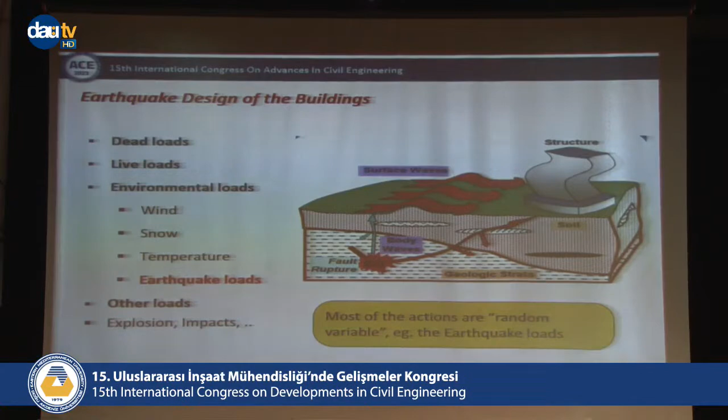But the earthquake itself, the rupture, changes randomly, so that each earthquake teaches us a lot of things. Therefore, the earthquake action is different - it is random and rare. Therefore, we should include in the design something that we don't really know very well.

In other cases, we have very big site effects because of the soil and valley effects. The soil changes the characteristic of the earthquake, the characteristic of the ground motion. Even with the same earthquake, the same motion, we get different ground shaking according to different soils and different sites.

But after the Maraş earthquake, there is a lot we should learn, that it is not only this. In general, we were thinking that only the rupture and the site have the most effect, but after that we learned that there are still other factors to take into account.

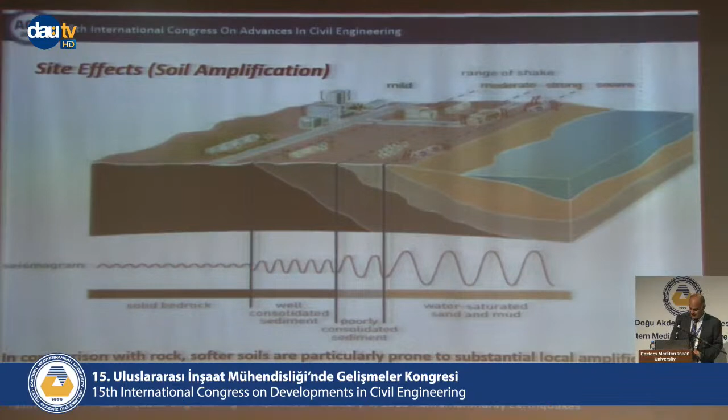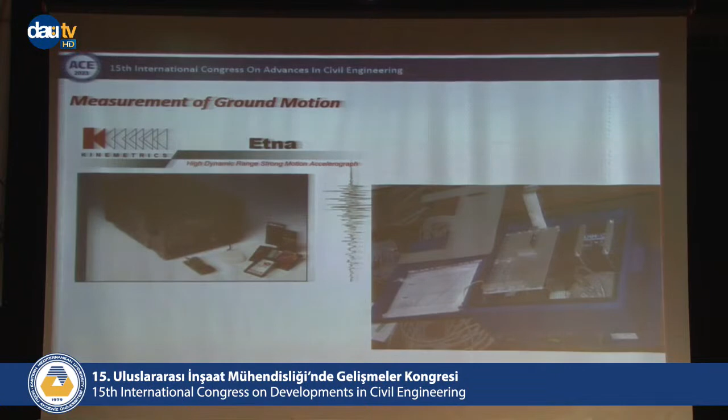Here's how we learn from the earthquake: we measure the acceleration. Especially when teaching my students, I say, why acceleration? It is very simple, because it is a force. Force is Newton's second law: force equals mass multiplied by acceleration. Therefore it's a very simple rule. We need the acceleration. We don't care much about velocity or displacement, because as Newton's second law says, very simply, F equals ma.

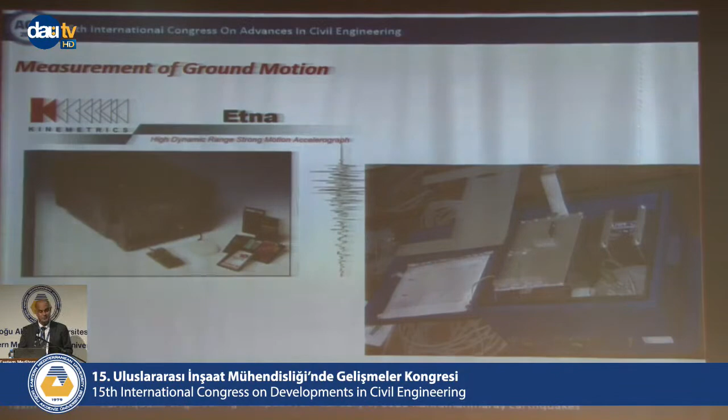Therefore, but which acceleration? As you see, we have different records, and each record has special characteristics. They are not the same. Even if we have the earthquake at the same location, the same fault, the ground motion and acceleration will differ because of the rupture process during the earthquake. We cannot expect the same. We have different results.

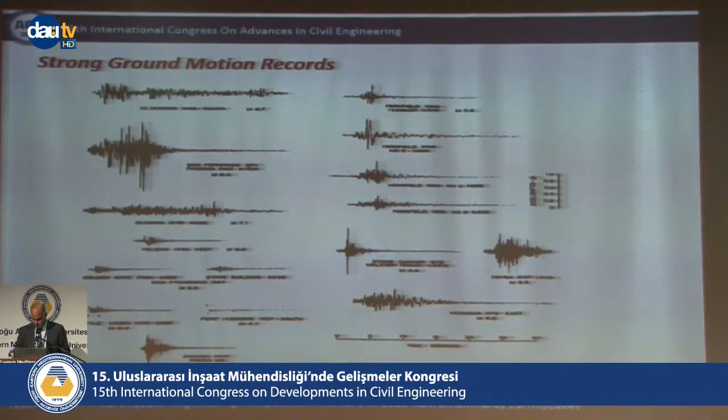Therefore, it's the simple rule that we have mass and acceleration. But which mass? The structural mass. If you have a very light structure, the earthquake force will be less. But which acceleration? Is it the ground acceleration? This is the basic question of earthquake engineers. Is it the ground acceleration? No, it is the acceleration of the mass itself, the acceleration of the structure.

Here, it is not only the ground shaking, it is the building shaking itself. The building has its own characteristic that we are designing. Therefore, we are the ones who decide the acceleration of our building. We call it spectral acceleration. Maybe you've heard this a lot, spectral acceleration. It is the acceleration of the mass of the building, not the ground acceleration.

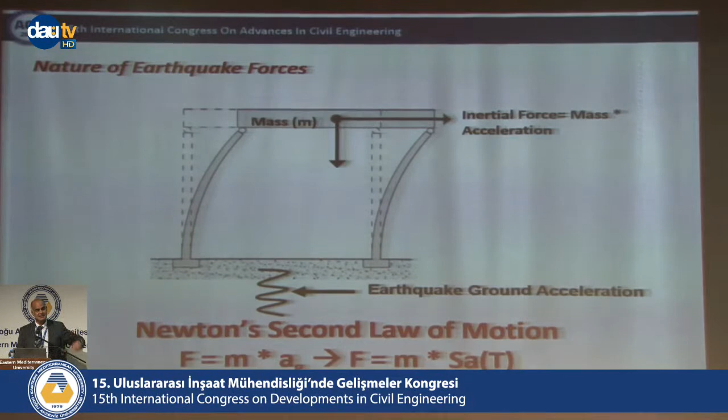Because, as you see, we have a building with different ground motions of different frequencies. What are frequencies? It is the sinusoidal motion in one second. The left one, maybe we have high frequencies. The right one, low frequency. Because in one second maybe you have one cycle, but here in one second we have ten cycles.

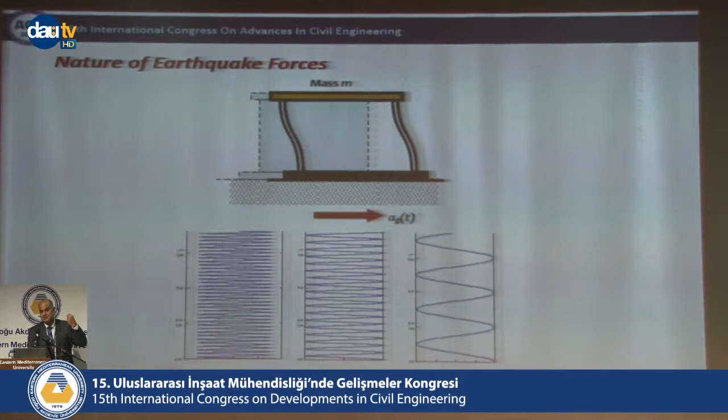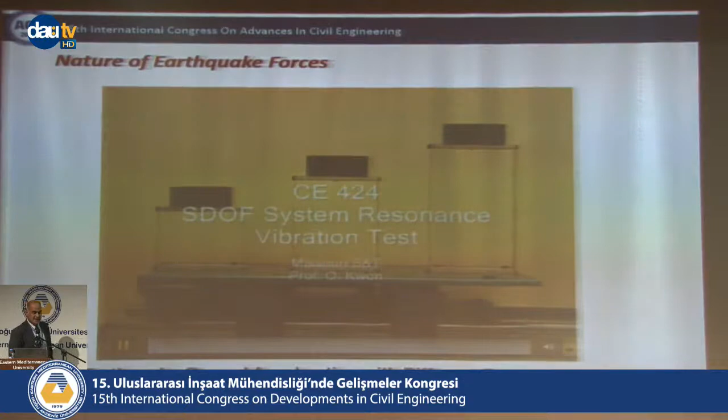If we have the same building with different frequency, will the response be the same? Because the ground motion is not what's important. What's important is the acceleration of our structure. This is a very famous video, I think; I always show it in my slides. As engineers, we might just think that the highest buildings always have the highest acceleration. Maybe that's what we think, but we will see whether it's true, whether our high-rise structure will have the biggest acceleration or not.

As we can see here in our video, maybe I'll just make it to gain some time. Oh sorry, we cannot gain some time. Okay.

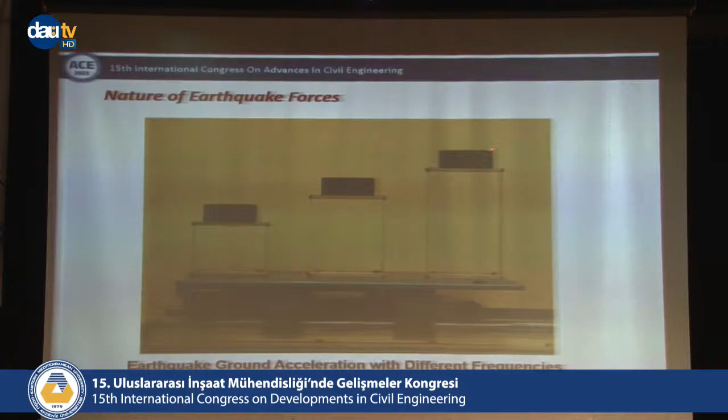Anyway, each building we represent with a mass and stiffness. This is the columns, so we have mass and stiffness. From this, we get its own period, what we call its own period.

As you see, if we have motion, an engineer who doesn't know about resonance in earthquake engineering would say, maybe the highest building will have the highest acceleration. Maybe this is what we think. But after this video, you'll change your mind that there's something else in earthquake engineering we need to consider: the frequency of our motion. If our motion has low frequency, that building will shake too much, meaning it has the biggest acceleration. But if I change the frequency here, we will see what happens.

Therefore, the frequency of the ground motion is the most important point here. As you see, this is what we feel: that the highest structure will have the highest acceleration, the highest response. So in the earthquake, all the high-rise buildings will fall. This is what we think if we're just thinking in a normal way.

But now, if we change the frequency of our building, as you see, the highest building has small vibration, and the medium one has the biggest one. Therefore, there is something else we call resonance. This is, therefore, earthquake engineering equals structural dynamics equals resonance. We need to know the resonance phenomena to know what we are designing for. This is important for us to feel that it is not only the acceleration, it is the frequency of the motion, the frequency of the structure.

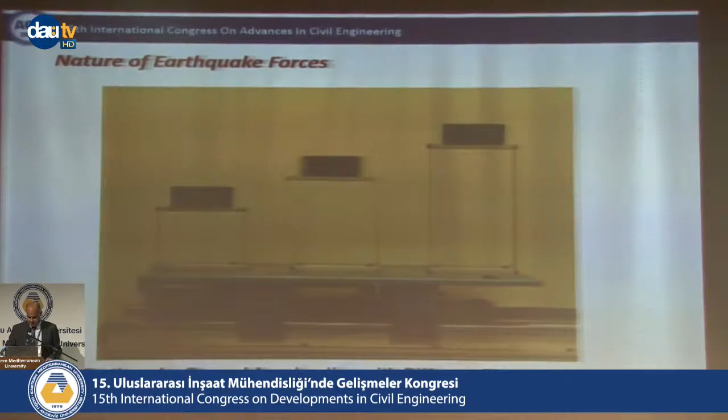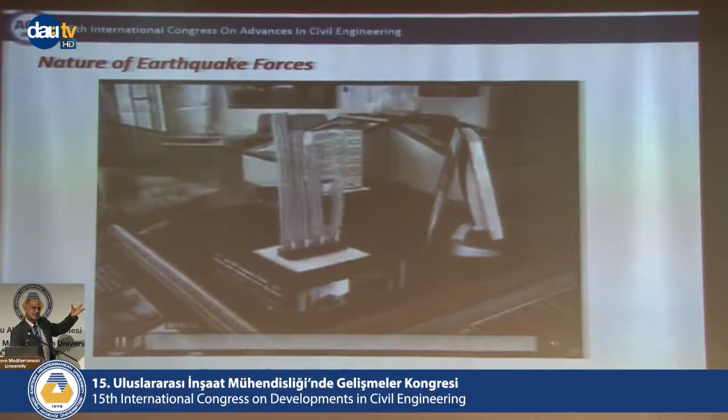If we have low frequency, the highest building has a lot of damage, and thank God our earthquakes will not have so low frequency. As you see, changing the frequency changes the response. This is important for our design.

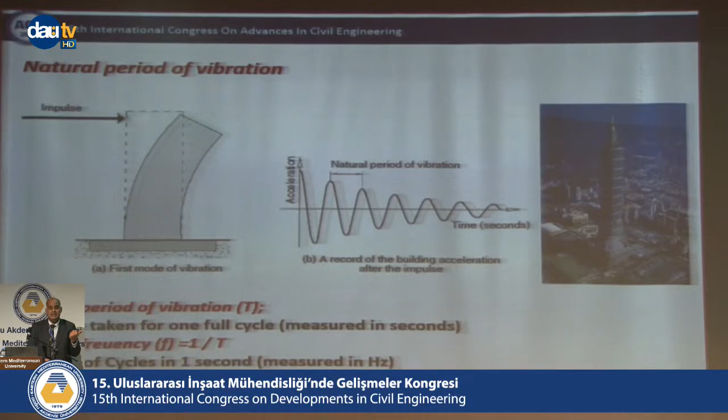Therefore, the natural period of vibration - the building itself, what is the period? It is dependent on its height, mass, and stiffness, and the ground motion itself. It is not only the peak acceleration, it is the frequency content, whether we have low frequency or high frequency in this ground motion. Therefore, this is a very, very simple formula.

I am teaching it for the students. If you want to make it very easy, our period of our building is 0.1 multiplied by number of stories. It is very easy, and I generally use it for architectural students when I teach, just to have a very good imagination. 0.1 times number of stories - what is the meaning of it? If you have a 20-story building, you have 2 seconds. If you pull it, it means its vibration, free vibration without any motion, is 2 seconds. If it is a 1-story building, it's 0.1 seconds.

Why is this important? Maybe because of the high-rise building, people say we feel the earthquake very large and very long. This is the question - why? We have damping, because if we don't have damping, the building will shake forever. Therefore, with damping, let us say 5%, we have 20 cycles according to the period of the structure. After the earthquake, if we have a 50-story building with 5 seconds period, 5 multiplied by 20, you will still have a 100-second feeling of the earthquake - 10 seconds, 100 seconds for high-rise building. But for very small buildings, it is just 2 seconds, then it will finish.

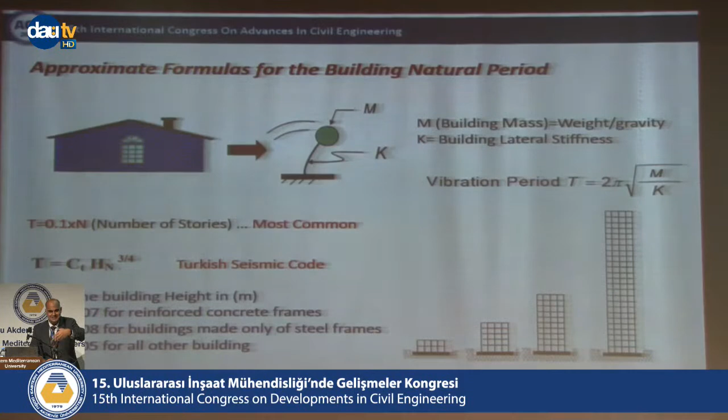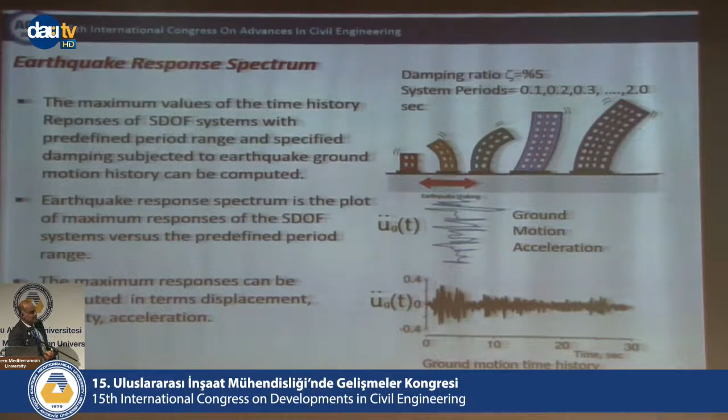This is the difference, but it does not mean that high-rise buildings will have extra damages. No, we are designing everything accordingly. Each building, depending on the period, has a different response. Therefore, if we have the same earthquake record, for different buildings, each building, depending on its period - 0.1 multiplied by number of stories - has a different response. Therefore, this is what we are using for our design.

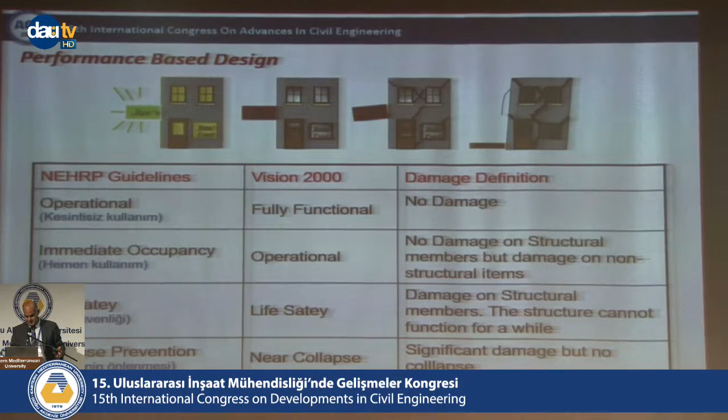Therefore, sometimes it is impossible. Therefore, we make performance-based design. We allow damages - this is our concept, the concept after 1970. We allow some damages. We call it performance-based - I will take less acceleration, I will allow my building to damage, but of course not collapse. This is no collapse, this is the idea. If we have acceleration more than what we expect, we can have some damages, but without collapse. Of course, the performance depends on the building itself, whether this is a residential building or a hospital.

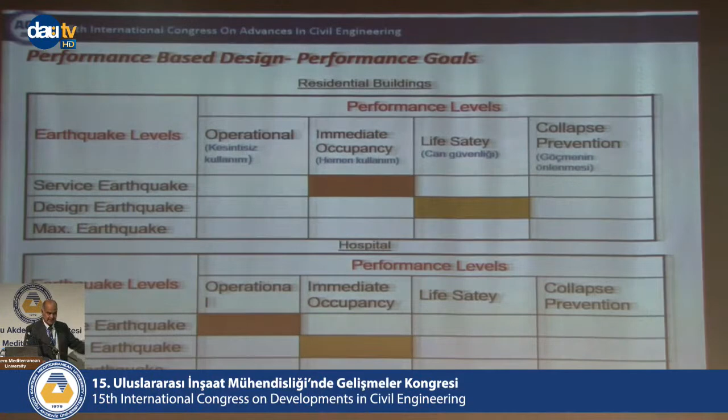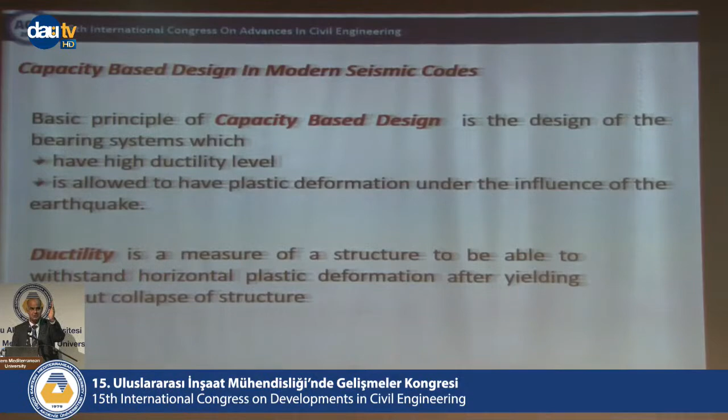Because the hospital needs to be operational after some level of earthquake, we have different criteria. Therefore, we introduce the concept of ductility. What is the meaning of ductility? That after damage, it will not collapse. It will have plastic displacement. This is the meaning of it.

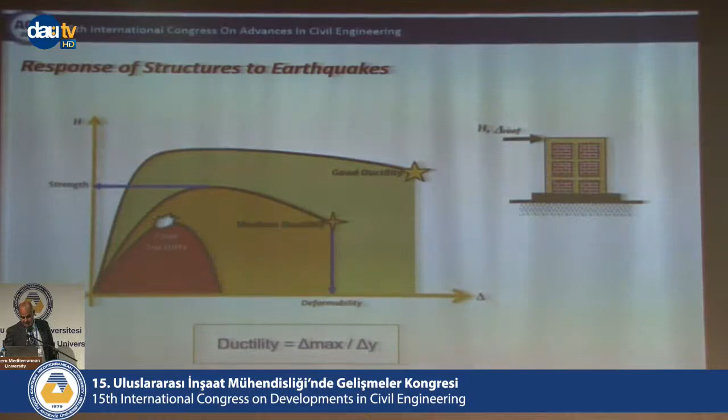For poor ductility, which we will see in the old buildings in Kahramanmaraş, the building will collapse immediately with little damage. But for high ductility, with good ductility, it means after the damage, it will still stand and save the life of the people. This is the concept.

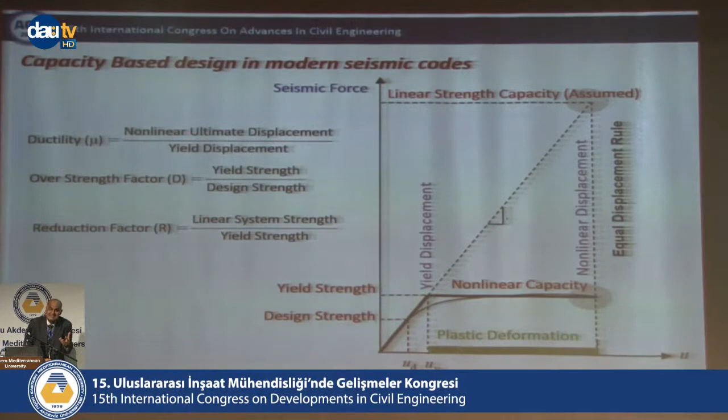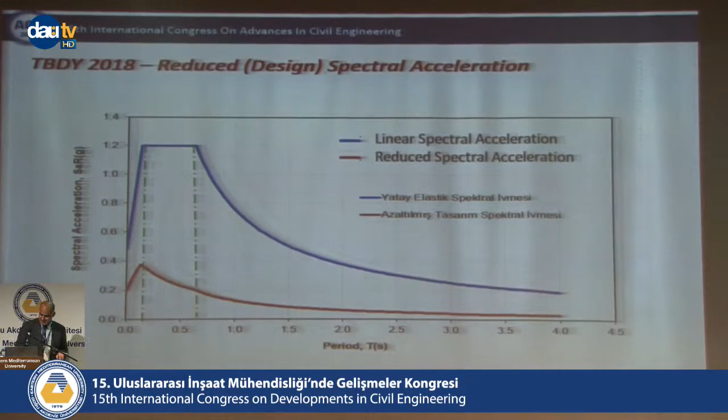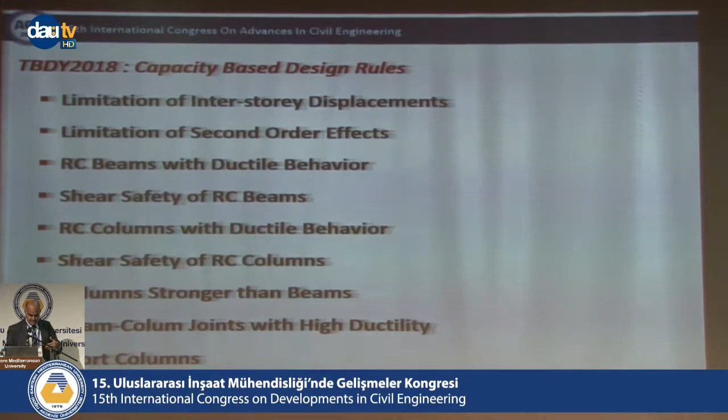Otherwise the cost will be too much. We have a lot of limitations - limitation of displacement, second order effects - but the most important one here is strong column, weak beam. For earthquake design, your column should be strong, stronger than your beam. If damage happens, it should happen in your beams, because if beams are damaged, you don't have collapse or mechanism. Here, as you see, we have mechanism, we have collapse here. Therefore, if it is in the beams, we still have stability.

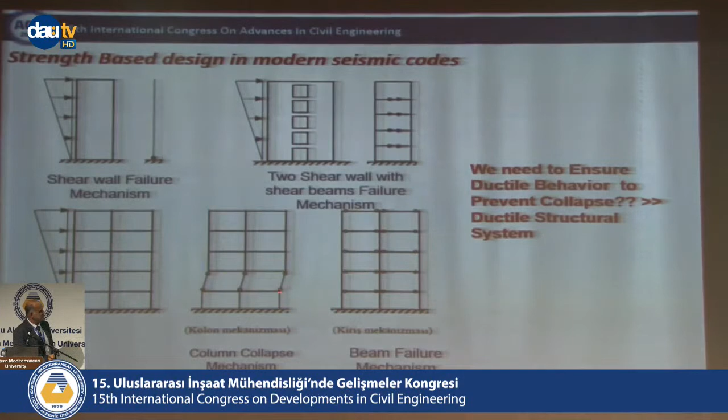This is an indeterminate system, and still it is safe. Here we have a problem, and we have full collapse.

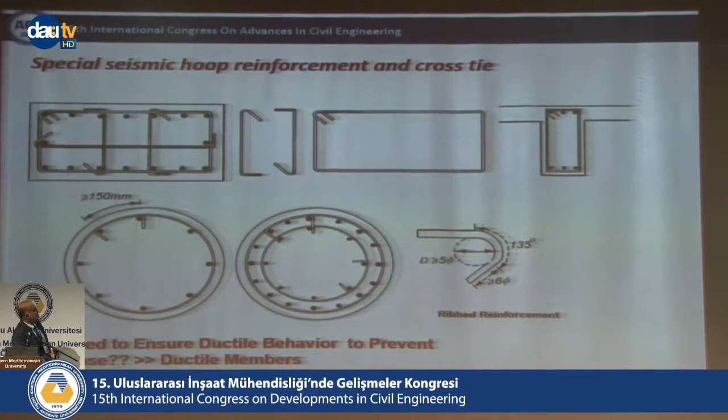Another thing which is very important is the detailing, because we need ductile members. The member should be ductile. We use special hoops and cross ties. This is what we are using in Turkey.

In Turkey, after the big earthquake in 1939 in Erzincan, we got new codes. Our codes after 1998 are modern codes, modern ideas. Even in 2018, we have very modern codes, similar to American codes, and better than European code. Therefore, we have a very nice code, but that's not the problem.

It is not only the codes. The construction styles - we feel very sorry that the construction material and construction style is not compatible with our codes.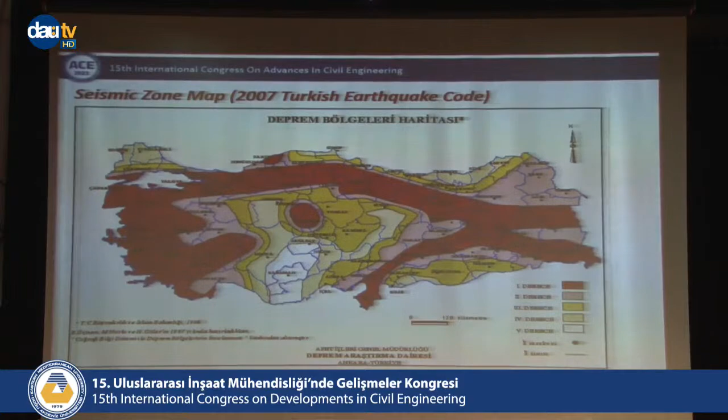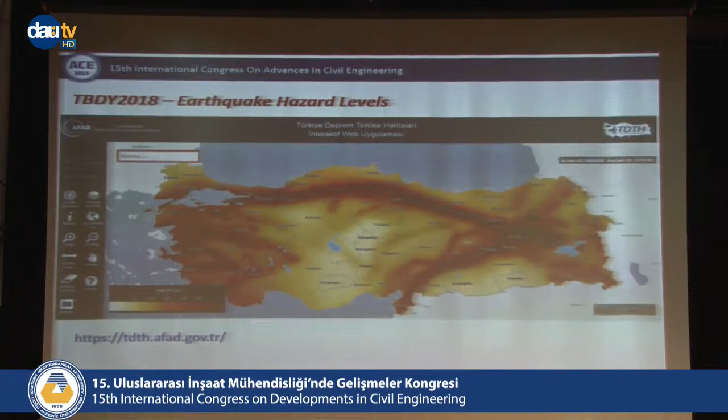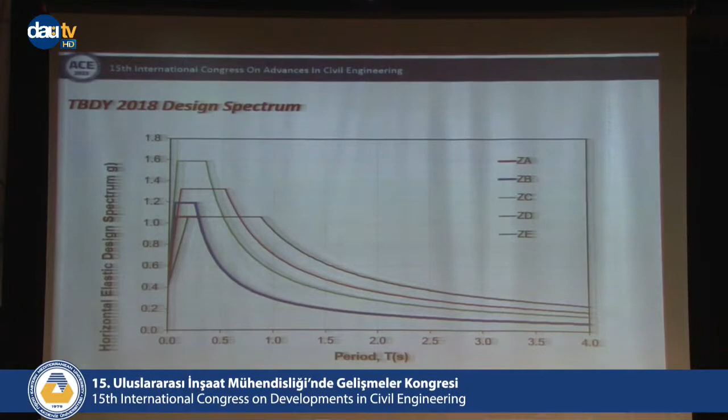We also have a very big change in 2018. We had one seismic map in 2007, and in the European code they have only one seismic map, but now we have 4 modern maps, compatible with American codes or new hazard maps. We have 4 levels, because you are not designing for the biggest earthquake. We design for 50 years, 10% in 50 years probability. Therefore, we have 4 levels for different buildings and different codes. Also, the soil effects are now taken into account in a very good manner.

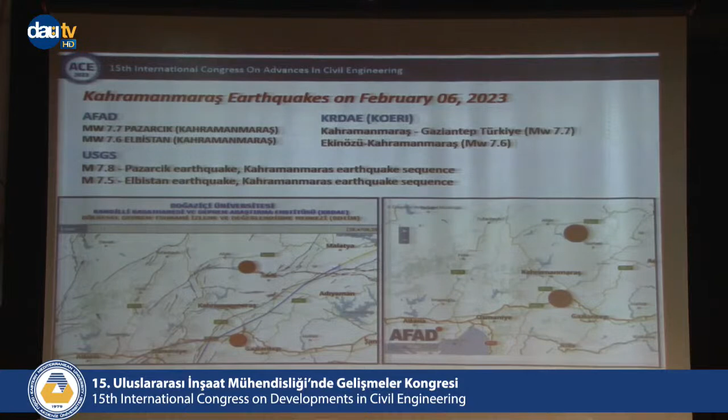Now, for the Kahramanmaraş earthquake, what happened? It is really very interesting. We had 2 very big earthquakes in one day, one in the early morning, one in the afternoon. Very strange. I will show you that in USGS, we have 7.8, which rarely happens in Turkey. And the second one, 7.5, really very huge. We can check the ground motion - we never imagined that we had such ground motion in our area.

Another thing this earthquake taught us is that the epicenter of the earthquake is not the most important point. The epicenter is in Pazarcık - I went to Pazarcık. But the biggest damage was in Hatay, around 200 kilometers far from the epicenter. This is something unimaginable, a change in our thinking.

All these faults up to here have already damaged in one segment. All the geologists, no one can expect that all of them will damage at one time. I work with many people in Kandilli Observatory. They are saying maybe it could be 3 or 4 earthquakes that would damage all this part, but in one, no one could imagine.

If you go even back in history, up to 1,000 years, you cannot find all these segments damaged at one time. Therefore, what happened, we don't know why. The geologists will work on that - why did this very big, around 300 kilometer rupture happen?

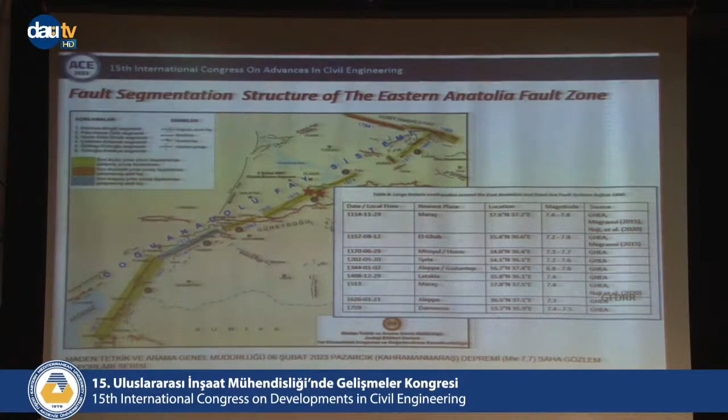Comparison to the Kocaeli earthquake, which was 80 kilometers. Now it is a 300 kilometer rupture at the same time. As you see here, this happened 100 years before, and here 1,000 years before, but all of them together never happened in the history, in the written history. Therefore, really, this earthquake, we cannot imagine, and we don't design for it.

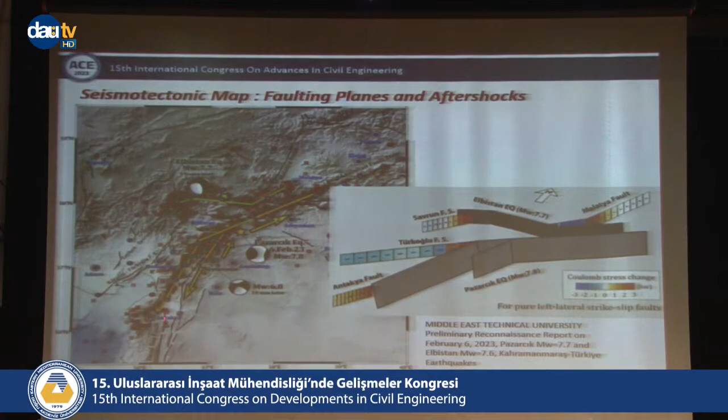Here it is very, very strange that the first earthquake is in Pazarcık. It is not on the main fault, it is on a very small fault. This is strange because all the TV crews go to the epicenter of the earthquake, which is Pazarcık, but the main damage is not in Pazarcık. It is very small, moderate fault damage here, but the biggest damage is from Hatay to Malatya, which is a very, very big area. That we learned too much from.

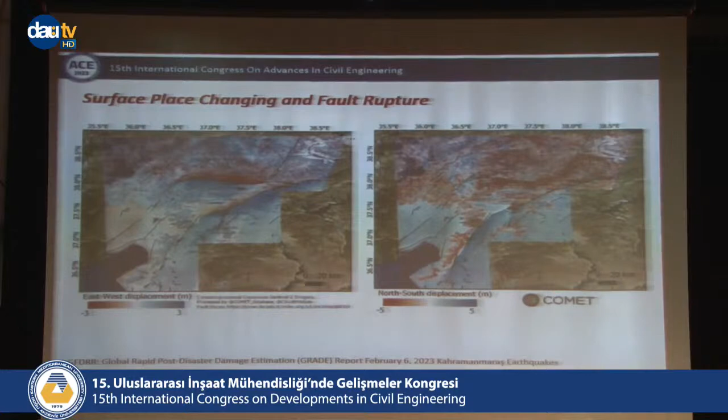This is something about the displacement. We have, around this area in Maraş, 6 meters slip, the displacement of the fault, which is really, really very large. But something until now we don't know - I asked a lot of geologists, geophysicists, all my friends. Even in Hatay, we don't have very large slip, but we have the biggest acceleration there. I don't know why. This is something we need to work on and show.

Another thing, as you see, it is because small earthquakes or small faults rupture together, each one has different characteristics, which makes this earthquake very, very difficult to analyze for seismologists and for engineers. Therefore, we still need a lot of time to work on it.

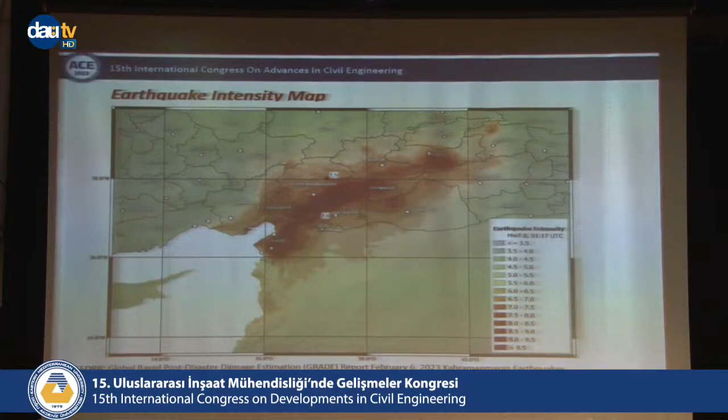This is the intensity map. This is the damages, which, as you see here, in Hatay you have the biggest damages. Fully damaged buildings, 6,000 buildings. We learned it after 2 days. Because I work with AFAD, they have 2 systems. The first system, which I made for them, the server was not working. They have another system using satellite imagery, but the satellite was not working because of very bad weather.

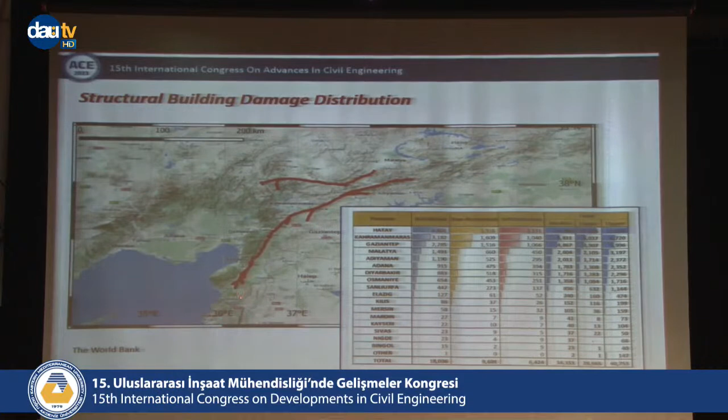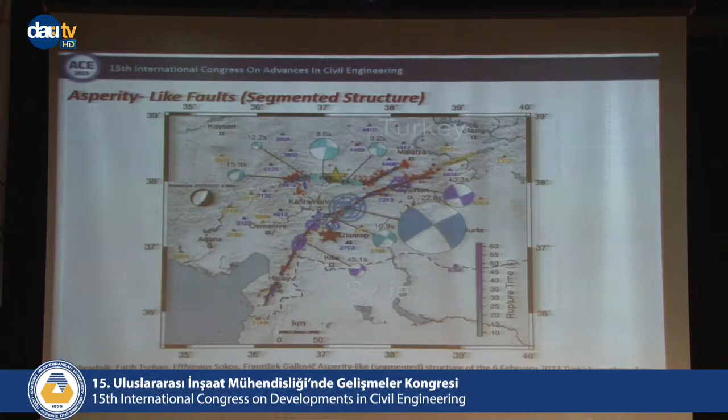Therefore, they could not understand that there was a lot of damage in Hatay. After 2 days, after the weather became clearer, they brought the satellite image and realized how much damage we had there. Because all of the geologists expected damage only in the north part, no one thought that the fault would go down all the way to Hatay. This is one of the biggest things we should have expected. They thought it was going up to Malatya, but from here going to Hatay, no one could imagine. Maybe after 2 weeks, USGS started to think, yes, this is the rupture - not because of the ground motion, not because of the geologists. Therefore, this is a very, very big thing that we are learning.

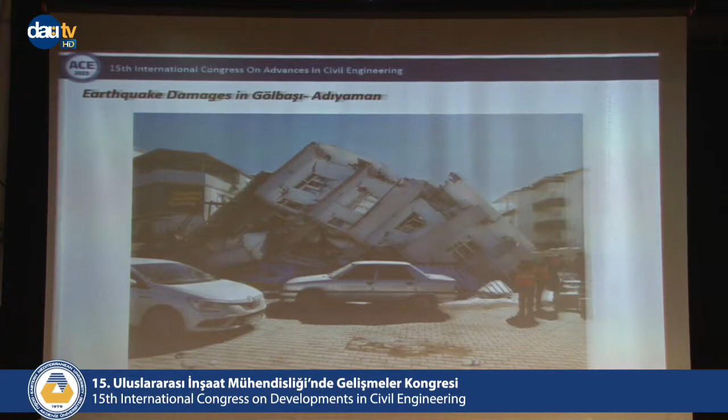This is, we can see here, for the old buildings, we have a lot of damage, because performance-based design is what we should apply. I don't want to show a lot, but I want to show here - this is what we are designing for.

We need, okay, in this Gölbaşı, it is just in Adıyaman, right on the fault itself. As you see, this is what we expected - if we make a good design, this is what we expect.

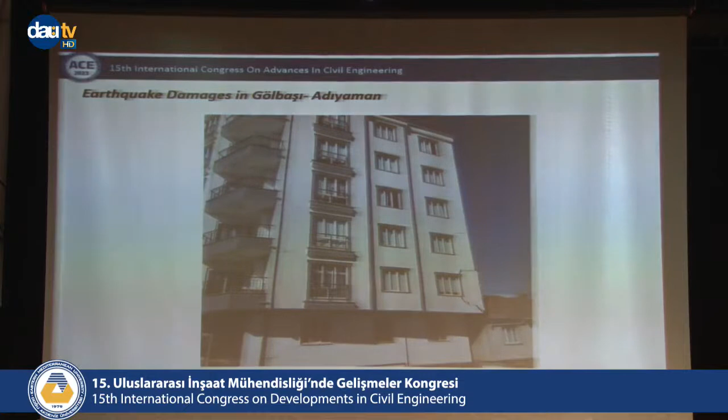Even just, I went there, just 50 meters, we have this - the fault passes from here. Here, just the fault is passing through this Gölbaşı, but still 100 meters far from the fault, we have a very nice building with no damage. Therefore, sometimes if we make good design, it saves our life.

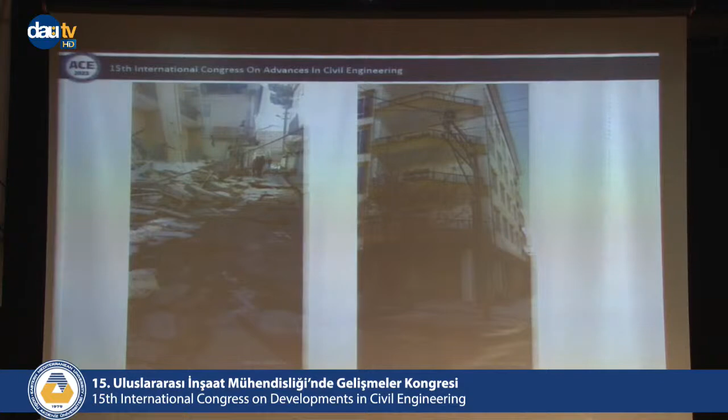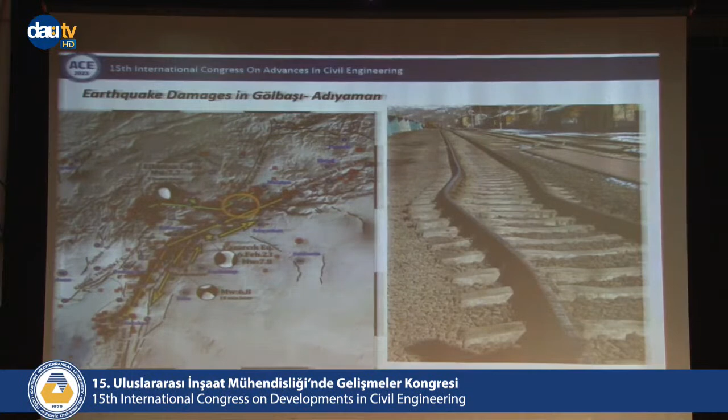Here also about the rails, it is very strange. Why? Because it is parallel to the fault. Most photos show faults crossing, but here it's parallel to the fault because of the compressional strains, which is very, very strange. We are learning a lot from that one.

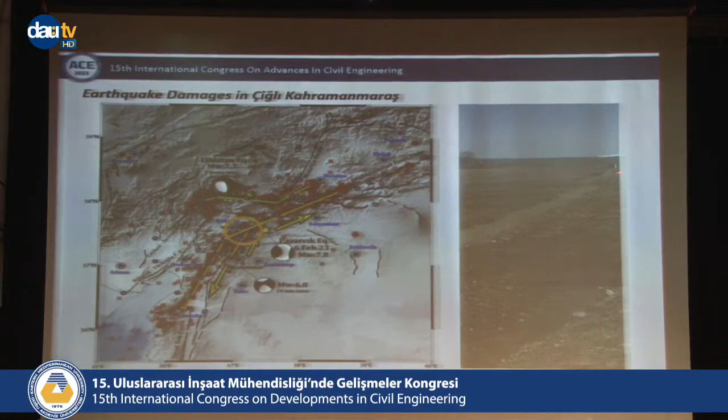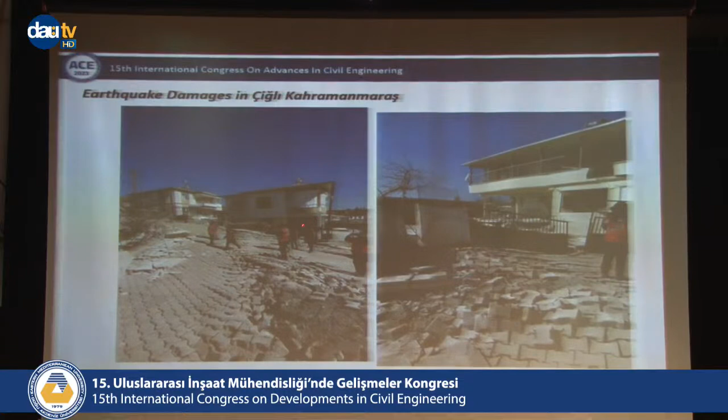We went to the site in Kahramanmaraş, exactly on the fault, on the maximum slip. You can see here 3 meters. And if you go there, it is just 3 meters in the fault, and you can see the building there - if you make good design, still there is hope. This is what I am trying to show. I don't want to show a lot of damage, but here just 10 meters from the fault.

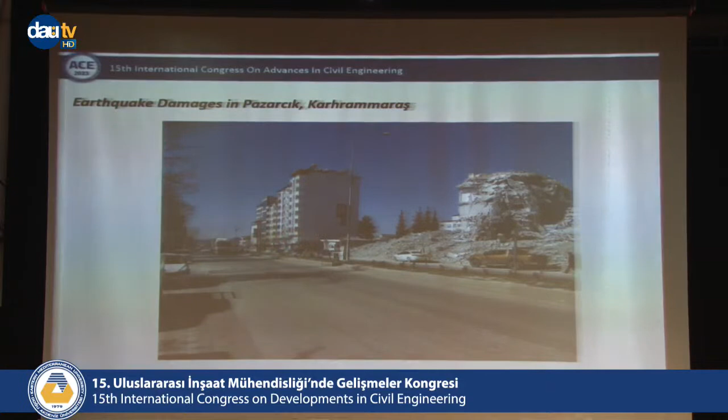Here it is, good. As you see here, the columns are gone, but the shear walls held. If you consider good shear walls, it will save lives. Here also in Pazarcık, it is just in the center, as you see, fully damaged, and also good behavior. It's not only the bad things, we learn from the good things too.

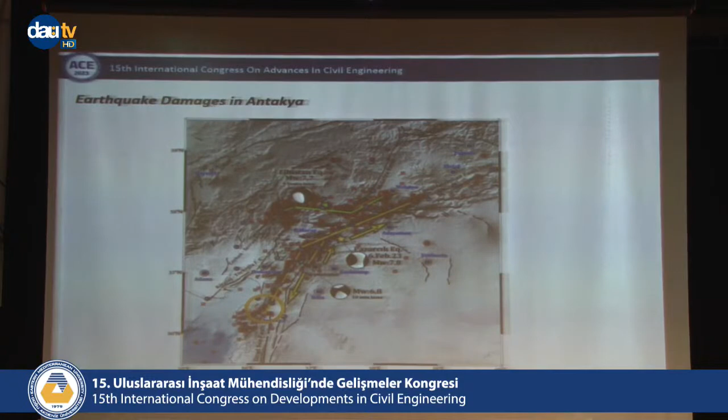Here it is in Antakya. I don't want to show a lot of photos here, fully damaged, especially in the center of the town, because all buildings had bad soil and valley effects.

If you're building in the valleys, the earthquake motion will start to make reflections and amplify. Therefore, the valley effects, we never considered in our design, but I think after this earthquake we need to consider it very seriously, because we are learning that. Not only soil effects, but also the valley effects.

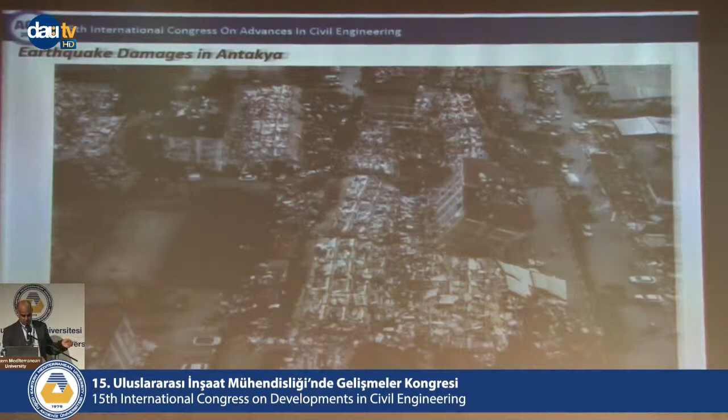Here also, one damage in Antakya, that area maybe you all know about. In central Kahramanmaraş, this is an old photo - as you see, very old building, bad soil, 10 stories, 8 stories, which is the worst case for a big earthquake.

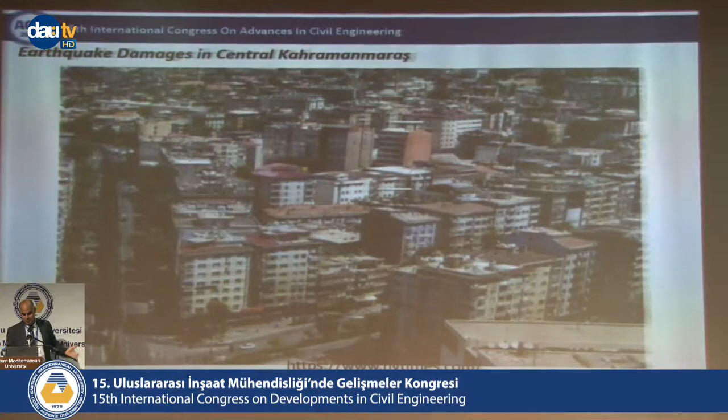For the big earthquake, we have long period, low frequency. Long period will affect the soil, amplification of the soil. The building itself has a long period, 1 second. Therefore, we call it double resonance of our motion, and this is what caused these photos.

I'll just make maybe 5 minutes about the ground motion, a little bit about what is happening there. Here, this is just very fast - this is our response spectrum. I'll show 2 of them.

Therefore, it is not only the soil - it's not only because we consider soil effect, source to path effects, same magnitude, but here maybe we call it near fault, or something happened there. Still we need to work on why we have very, very high acceleration there.

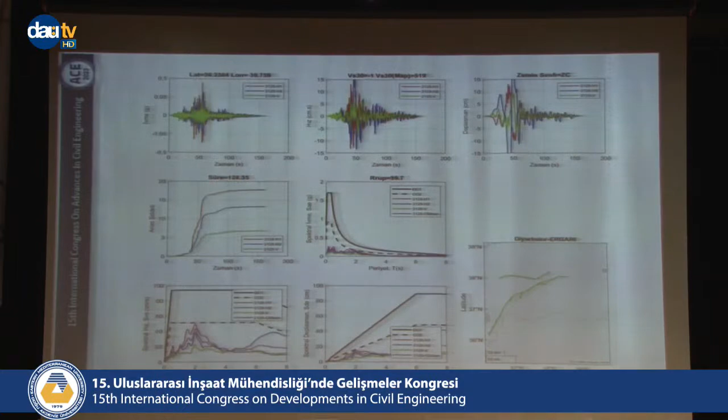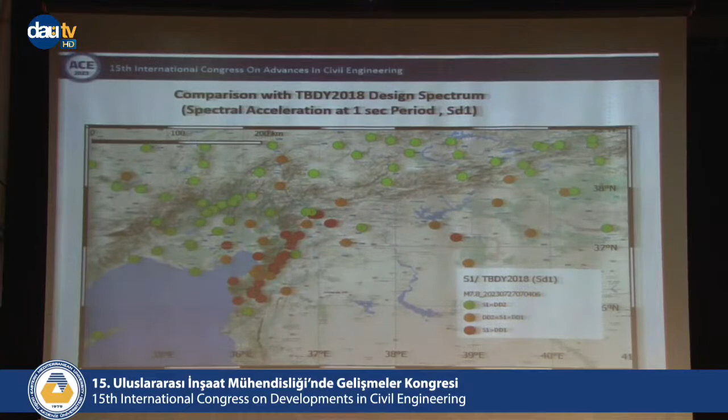Very strange things if you go to Diyarbakır - it is a very big lesson, even at a location far, 270 kilometers from the earthquake, we have around 300 buildings damaged there. We always give the example of Mexico City - Mexico City is 120 kilometers away and had damage. But here, 270 kilometers far, and we have damage that we need to work on. Therefore, this earthquake was really very big.

We can also learn something about the significant duration, how you feel the earthquake. Sometimes you say, I am near the fault, so I feel it longer - no, if you go far, you feel it even longer. If you are just near the earthquake, you will feel it up to 50 seconds. But if you go far, you will feel it up to 2 minutes. Therefore, the people in Adana or this area, maybe the shaking was a little less, but they felt that shaking for much longer.

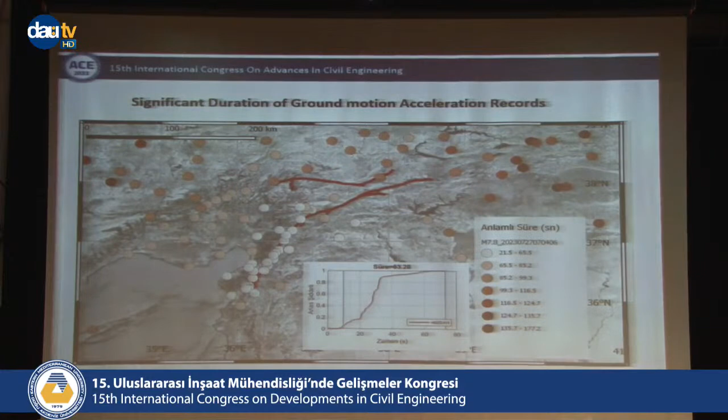We never expected this in Turkey. When selecting the earthquake duration, we used to select 30 or 40 seconds. Now we need to select 120 seconds or more. Now I will try to finish by making a summary of lessons learned from the Kahramanmaraş earthquake.

The ground shaking acceleration can be more than we expected. We expect something based on previous experience, previous earthquakes around the world. But sometimes we can have more, depending on the near field rupture process, because as you see here, multi-fault, multi-rupture, with the same distance we have different characteristics.

Therefore we need to learn more. But as a lesson, as Mr. Rector said, we need something here. What are the lessons to teach to the community? This is for the engineering designer. This is very important. Soil effects may change the ground motion more than we expect because of valley effects. This relates to earthquake design philosophy.

We need to update it. We have very new buildings in some areas in Turkey, but they were fully damaged. Why? Because of the construction. So from myself, I'm thinking we need to change this rule, because not all construction companies work with honesty and good materials. Therefore, as a rule, we need to introduce new regulations that account for bad construction, especially in our country, Turkey, so that even with construction errors, there will be no collapse.

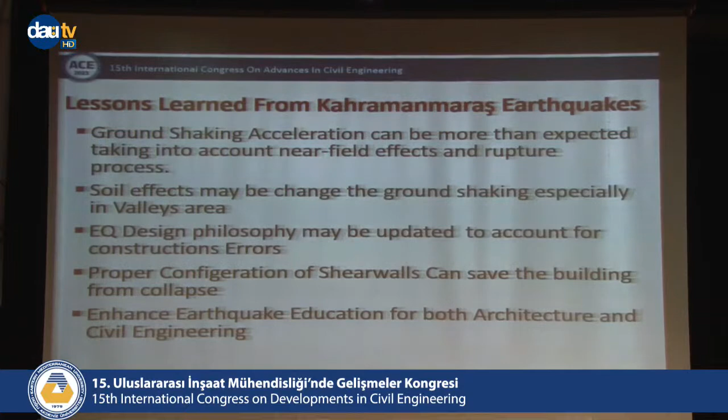Our engineers now, I don't know, nowadays engineers like to use computer programs for analysis and software, just entering what comes from the architecture and making the design. But I think the architects should learn how to make better configurations for earthquake resistant design.